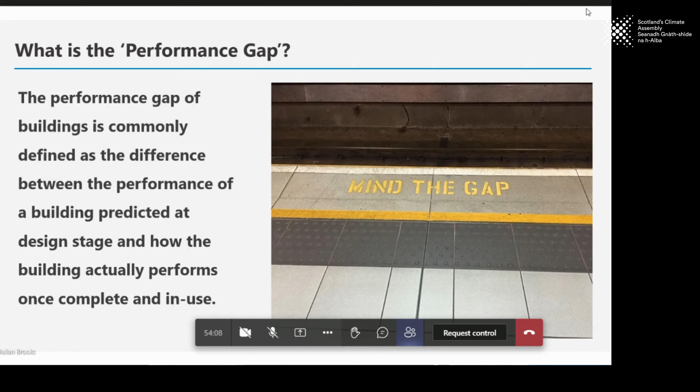So is it just about energy? No, it's not. As I said earlier, it's about the occupant comfort issues, whether it's temperature, drafts, humidity, overheating, the indoor air quality, the amount of fresh air changes, CO2 levels, and moisture.

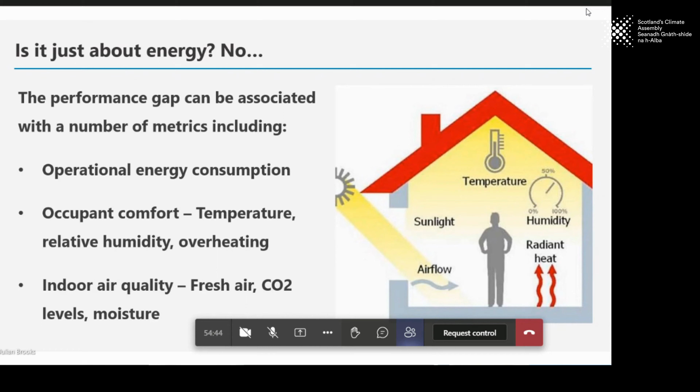I believe in Scotland, building regs, you've had CO2 monitors actually installed in new homes. Correct me please if I'm wrong, but I think you have. So you're actually already in advance of some of these issues and fully aware of them.

Why does it occur? Poor design, modelling, inaccurate occupant behaviour assumptions. There's a lot in that statement, probably not worth unpicking too much of it now - maybe we can do that in the workshop. Poor workmanship and on-site practice, an age-old problem. A lot of trades, a lot of coordination, and not always well managed.

Substitution of materials from those originally specified. They used to call that value engineering when I was in that business, but actually it's more than that. A lot of the time you are getting a cheaper product with poorer performance.

Insufficient inspection and on-site verification, a lack of police on site, the building police effectively. I don't know what it's like in Scotland, but certainly in England, that particular discipline has been pared down, hollowed out over the years, and there aren't enough people on site doing that checking.

And then contractors and training for them so they can understand the importance of these details - an age-old problem. Some contractors are too busy to let their operatives be let off for the day to go and do some training. But we can discuss that more fully in the workshop. Lack of understanding of building standards and requirements, says it all.

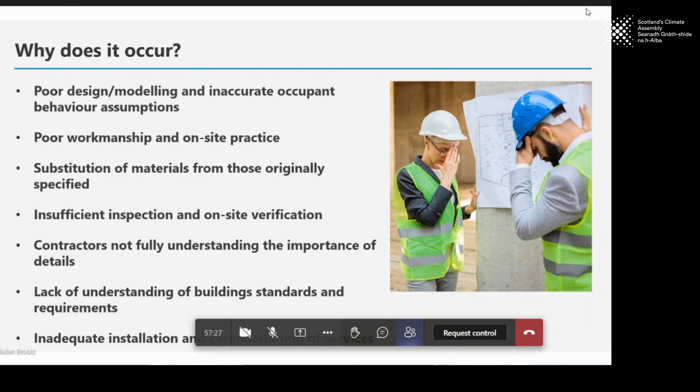How are we doing on time, Laurie? I'm not sure, where are we? 13:28. You're a wee bit over time, but not really, because we started a bit late, so you've got a few minutes.

I'll rattle through. So how can we close this performance gap? There are lots of studies on this, and there are tools. Passivhaus will help massively because it's such a robust process. So you've already picked Passivhaus out, which is great - you're already more than halfway there.

Building Performance Evaluation, or BPE, is a term you're going to hear more and more of on our journey to net zero new housing. I think there's going to be a new discipline here. For those thinking about a future vocation and interested in buildings, there's scope for a building performance evaluation assessor or evaluator. There will be courses coming up - one place to watch is the University of Sheffield, where Professor Fiona Stevenson works, but hopefully Strathclyde might be doing something too, they've got some good people there. So BPE, look out for that.

There'll be a new British standard on this as well, 40101. It's due to come out early next year.

Quality assurance methodologies - there's a couple around. One was developed by Bioregional called BEPIT, which is worth checking out. It's got an interesting little acronym, I won't go into what it stands for because I can't remember. The other one is the Assured Performance Process, which we're involved with the National Energy Foundation on, so look out for that next year. I'll talk about that in a minute.

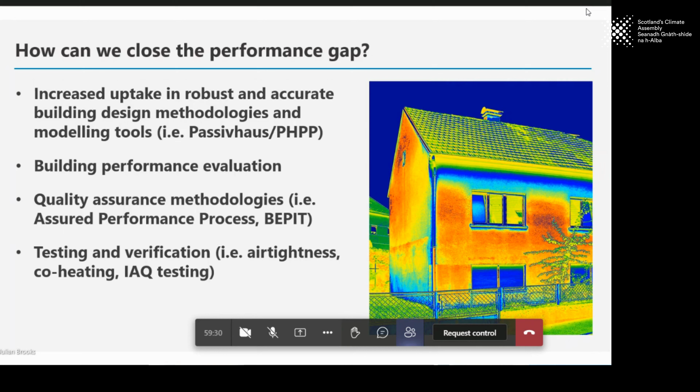And then testing and verification - air tightness testing, coheating, indoor air quality testing, all of that will have to take place. We've developed some model employer's requirements around this, available for free from our website.

What do homeowners want? Well, as these homes don't perform as predicted, it leaves homeowners with this issue. Generally though, they don't have a clue about these performance gap issues. It's not something the estate agents or sales office of the house builder will tell you about. So there's an issue about education of homeowners that still needs to be done - maybe the Climate Assembly wants to look at education around those issues. It needs to be demanded by buyers.

We did some survey work with the Design Council - we're involved - and it picked up on what matters most: homes that are comfortable and easy and affordable to run and maintain. A no-brainer, really. But the performance gap doesn't provide that, so it makes those things harder to attain.

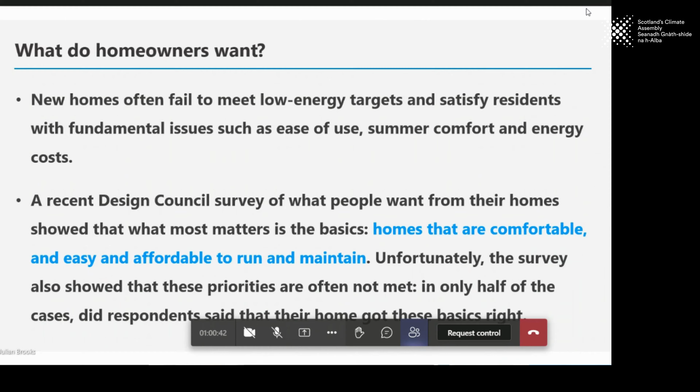We've also been doing some State of the Nation review work on performance evaluation of new homes, with some shocking results, which is also available. I mentioned the British Standard and the training that's needed - we're working with the Building Performance Network to create online training materials for building performance evaluation and QA. Look out for that. It's not ready yet, maybe next year in the summer we'll have something available.

The Assured Performance process is a very robust, thorough process, going from early design stage all the way through to completion and beyond. This is a tool effectively designed to eradicate the performance gap, and that will be relaunching next year.

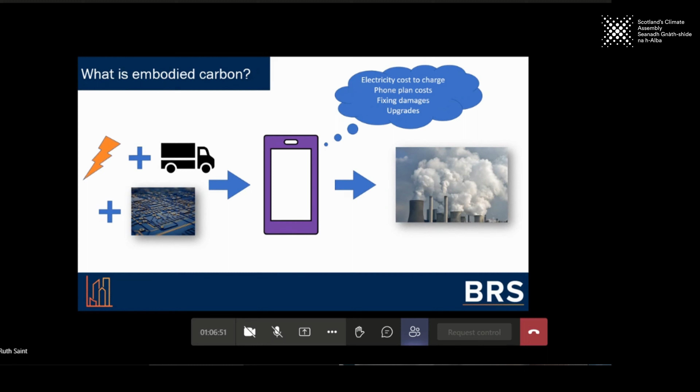So, what is embodied carbon? Say you get a new phone. The main things you're thinking about are probably how much that phone is going to cost you to run, for charging and bills etc, and how long you're going to keep it for. You're probably not thinking about all the energy and materials that have been spent to make the phone in your hand, and the environmental impacts associated with production of that energy, and the mining, extracting, processing and transport of the materials needed to make the phone, as they are embodied in the product itself. So when that phone leaves the shop shelf and goes home with you, there is a long trail of impacts left in its wake, and these are known as embodied impacts. So to make that phone, there is a hidden environmental price that people often don't think about.

Stage B is the use phase and is where the operational emissions occur. Stage C is the end of life stage, where the building and its components get deconstructed or demolished. Stage D is a supplementary stage to the life cycle and considers reuse, recovery, and recycling potential, including the benefits associated with keeping materials in the resource loop, which is where design for disassembly or demountability is very important.

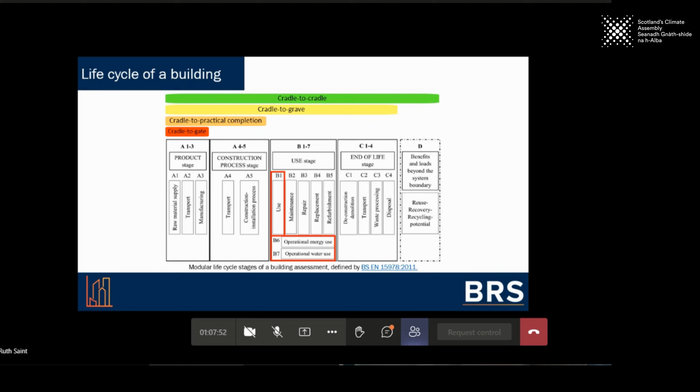So of these life cycle stages, only stage B1, B6, and B7 refer to operational. The majority of the life cycle falls under embodied impacts of the building.

So these are some of the climate assembly recommendations related to embodied carbon. I'm not going to read them all out, but basically the recommendations for the first goal around quality standards of EnerPHit and Passivhaus design, which Sarah will talk about after me, are around building standards regulations and include whole life assessments, including embodied and operational impacts, and design being driven by end-of-life reusability and recyclability through design for deconstruction.

The second goal here, around retrofitting Scotland's existing building stock, includes recommendations to retrofit all homes and decarbonise by 2030.

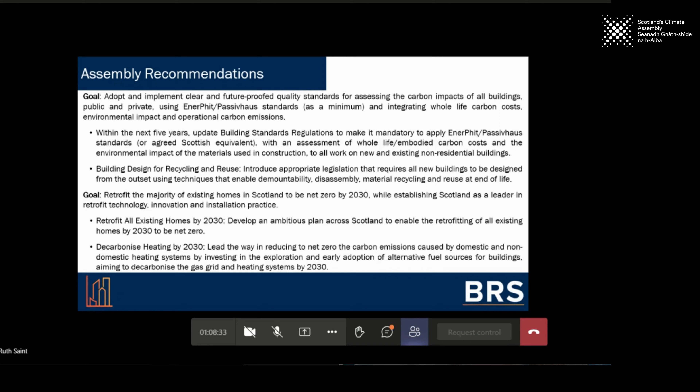In terms of the first goal and whole life assessments when designing to Passivhaus and EnerPHit standards, this is really important because the built environment is responsible for approximately 45% of CO2 emissions from the energy consumption of residential and commercial properties for space and water heating, cooling, lighting, etc. So the operational emissions. Passivhaus and EnerPHit standards aim to significantly improve the operational efficiency of homes, thus driving down its demand. Alongside this, though, as you drive down operational emissions, the proportional contribution of embodied emissions gets bigger.

So the stats shown here give an indication of this shift, with the embodied carbon contribution to the whole life cycle impacts being between 11 and 33% for passive designs, which is not necessarily the same as Passivhaus standard, and as much as 100% for near zero energy buildings, which is where the definition only considers operational energy and the energy supply is largely from renewable sources.

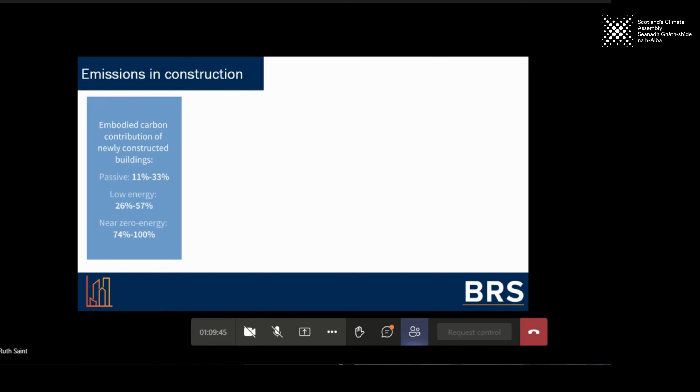So it's very important that materials and technologies are selected carefully, considering source of supply and logistics, that the energy efficiency of construction practices is increased and optimized, that embodied impacts are considered as early as possible in the design stage, and that design for deconstruction is implemented. It's also really important to bring everyone involved in the design to the table at the very start in order to choose a well-balanced, fit-for-purpose solution.

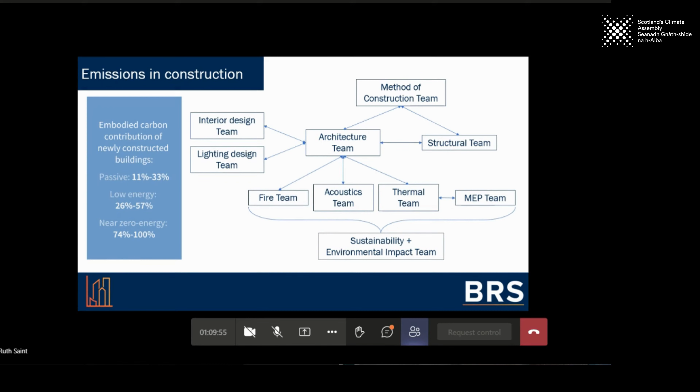For type 1, there is no link between embodied and operational carbon. For example, a smaller versus a larger steel beam in a building. The larger beam will incur more embodied carbon because it's bigger, but it does not offer any additional operational energy and therefore carbon reduction benefits. If the smaller beam is able to provide all the structural requirements and fulfills the same function, obviously you would choose that one. Otherwise, you're over-engineering for the sake of it, essentially wasting carbon and probably increasing costs.

For type 2, where there is a direct proportionality relationship, we have an example of a timber window frame versus a steel window frame. The timber has a lower U value than the steel frame, i.e. it loses heat more slowly, so it contributes towards lower operational emissions as there's less heat loss, but it also has a lower embodied carbon impact because the raw material extraction and processing is less energy intensive. Also, you have the added benefit that the timber acts as a carbon store throughout its useful life as trees absorb CO2. So the obvious choice here is a timber frame, as you benefit twice: greater thermal performance and lower embodied impacts.

Now type 3, inverse proportionality - this one is tricky. Let's say we wrap a building with extra insulation, and that creates a spike in the embodied carbon right now, as we're paying this upfront embodied carbon cost to have operational energy demand reduction across the next however many years. So this insulation is being added while our energy grid is still relatively carbon intensive.

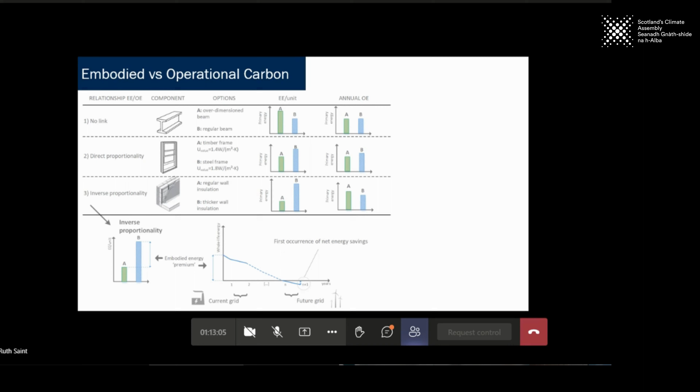So the same applies to any retrofit measure you add to a building, and the question is, if we carry out retrofit at scale, will it pay itself off? When does it pay itself off? With the ambitious recommendations laid out in the Climate Assembly report to retrofit all Scottish homes by 2030 to be net zero.

Or will it be too late by the time it pays itself off? So by the time it actually becomes net zero? And this is just Scotland. So what if this was scaled globally? How can anything be truly net zero if we don't consider the embodied impacts?

You're neglecting the majority of the building or product life cycle. So we need to think very carefully about our building stock and make smart carbon investments today, considering the whole life cycle impacts, not just operational, and future-proofing the decisions we make as best we can.

Now, I'm not advocating against retrofit at all. Strong measures do need to be taken, and something needs to be done to address the climate crisis. What I am advocating for is that embodied emissions are seriously brought into the conversation, and that they are at the forefront throughout all stages of building or retrofit projects. And embodied emissions need to be balanced against operational savings, considering the future of our energy landscape.

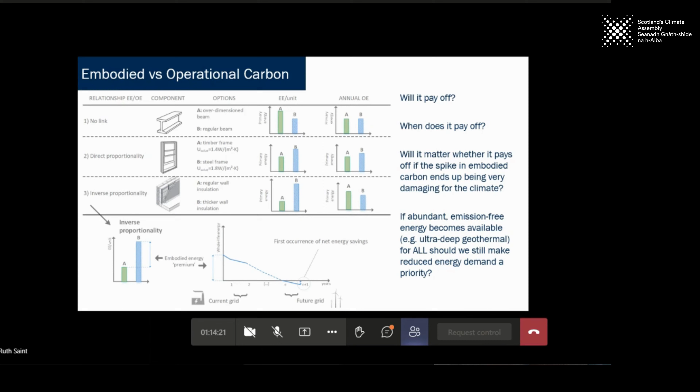So if anyone wants to read more about this, there are 3 great documents from LETI. The Climate Emergency Design Guide lays out a strategy for new builds, and linked to this is the Embodied Carbon Primer, which is an excellent document that allows people who are not familiar with the topic of embodied carbon to get a good understanding of it.

Also, the Climate Emergency Retrofit Guide for existing buildings, which are more problematic as you don't have the freedom you do with new build. You have to work with what is already there. It's very useful and offers a quick start guide to help you set appropriate targets and identify the best approach. It also offers a holistic view of sustainability and allows you to make a case for retrofit based on environmental, economic, and social factors.

So with that, I'll end on the reminder that although carbon is a hot topic at the moment and a very pressing issue, climate change is not the only environmental issue facing us. There are numerous other environmental factors to consider, and by focusing solely on carbon, we risk shifting the problem onto other areas of damage. To be truly sustainable, we need to balance holistic environmental impacts, weighing the benefit and harm across all environmental indicators, balanced with social and economic factors. Especially given the scale of the issues we're facing, we need a multidisciplinary approach, and we need to get it right the first time. Thank you.

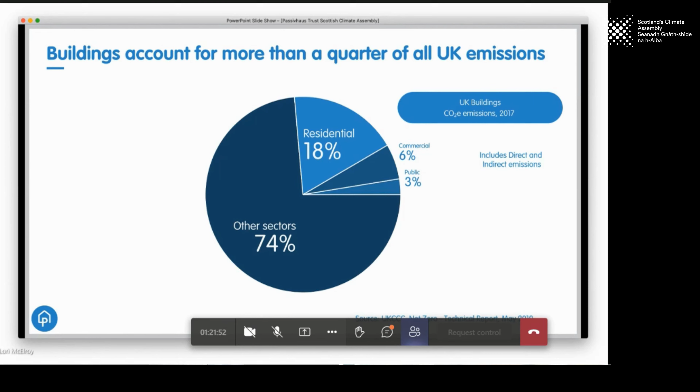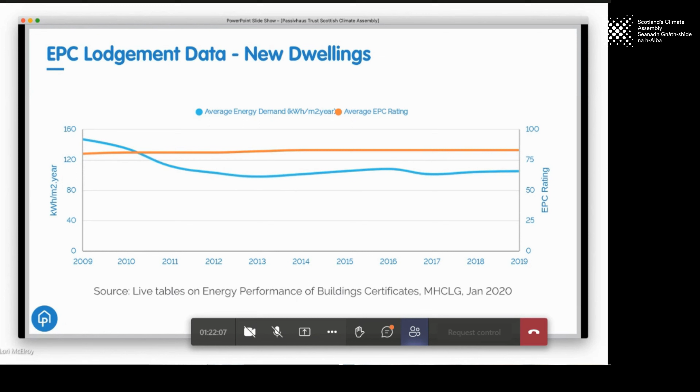This chart looks at the energy performance certificates lodged for all new dwellings in the UK over the decade 2009 to 2019. Shockingly, we see almost a complete flat line in terms of energy improvements. So in effect, we have this lost decade in our fight against climate change in our sector.

As the grid is decarbonised, there's an increasing case for us to use more electricity for heating purposes. So we need to move our homes from high carbon gas onto electricity, which means the heating loads previously satisfied by gas are going to need to be met by our electricity grid.

This is showing the gas use of our existing homes, just for heating and hot water—that's the orange and turquoise bar—and this is the peak load. You can see in blue what the electricity grid capacity is in 2019, predicted for 2030, and even predicted for 2050. So demand reduction is going to have to be part of the solution.

Another thing to point out is that if we don't retrofit our buildings and make them more efficient, there's of course an embodied carbon to doing that, but there's also a huge embodied carbon impact to having to build a huge amount of infrastructure and new renewable technology, lots of wind turbines, to supply that demand otherwise. So we have to consider that when we look at the big holistic picture.

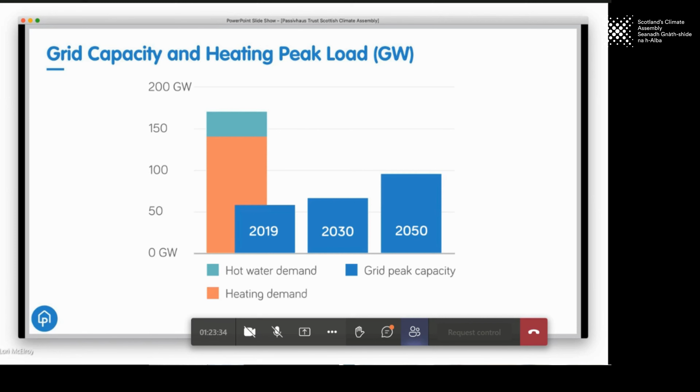When I talk about demand response, that's essentially this idea that not everything needs to be supplied to us all the time, not everything needs to be on all the time. So we could use this sort of demand response in a domestic house.

More specifically, if we look at the biggest energy demand in our homes, that's space heating, we can see what this would do to a typical UK home.

On the left axis, the red line shows the internal temperature, while on the right axis, the blue line shows the heating energy power being used by the home. In a typical home, the internal temperature drops off when the heating's not on, down to about 15 degrees. So we need to inject that heat to get the temperature up when we want it, in the morning or evening when we're using our home—and actually right now, a lot more common throughout the day when we're working from home.

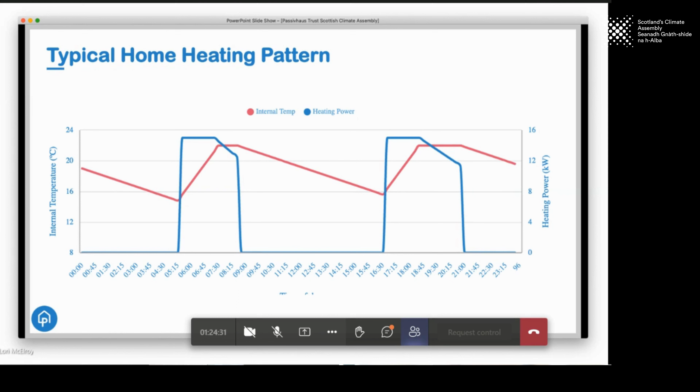By contrast, a passive house home can effectively take that heat at any time, so it's a much more flexible asset in that sense. In the traditional house, if you'd load shifted the demand to less peak times, your house would not have been warm when you wanted it to be. But a passive house is this flexible asset, and it can load shift to support demand on the grid.

The bottom line is that for demand response to work for a domestic building, we need a very efficient fabric to start off with. Then we can maintain a very comfortable internal temperature without any impact on the occupants.

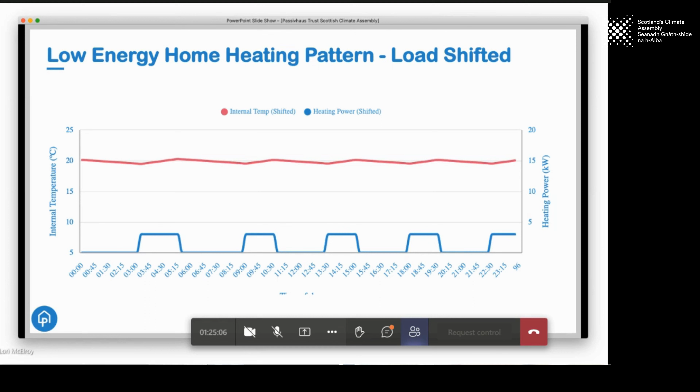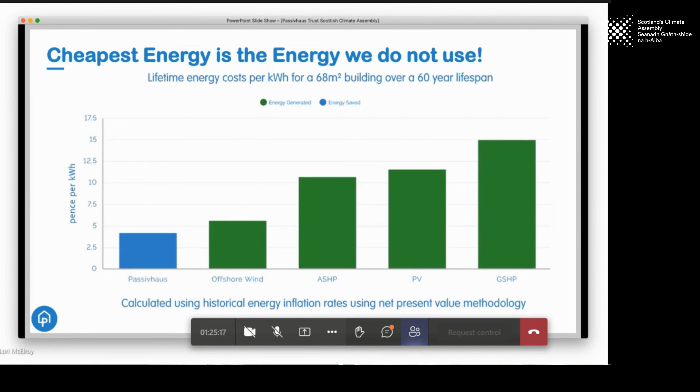An argument you hear a lot is that passive house and very low energy buildings are just too expensive. But we looked at the big picture and compared the cost of building more efficiently over the lifetime of a building—here we've taken 60 years—with the alternative of producing more energy, that's building more infrastructure. We can see the cost is 3 or 4 pence per kilowatt hour saved for building more efficiently, while the cost of generating that kilowatt is more expensive than saving it in every scenario for all forms of renewable energy. So saving a kilowatt is going to cost us as a country less than generating one.

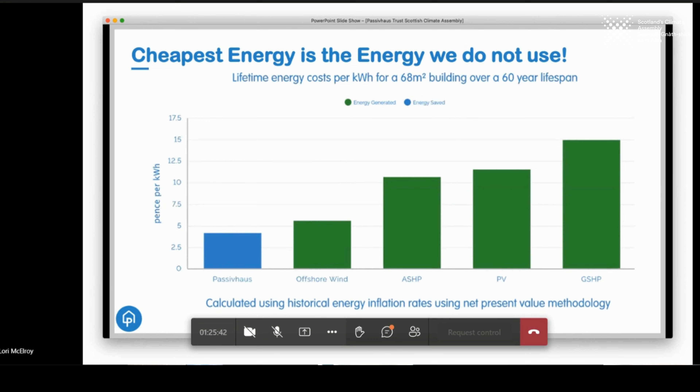I'm just going to spend the last couple of minutes running through a brief introduction to Passive House and EnerPHit, although I think a lot of people on the call will already be fairly familiar with the standard.

Passive House is this leading international energy standard. I'm just going to pull out a couple of these elements to give you an idea of the breadth of the standard—I've managed to lose the presentation on the screen, I don't know whether everybody else has.

It's still working, I'm now seeing the Chrome window. I'll see it again now, yeah. So you can just go on to the next slide. So this is the next.

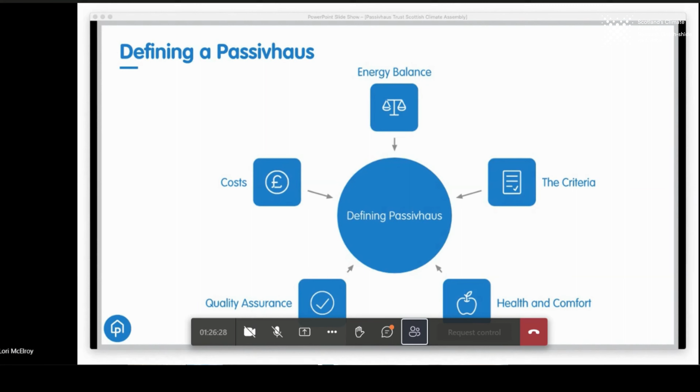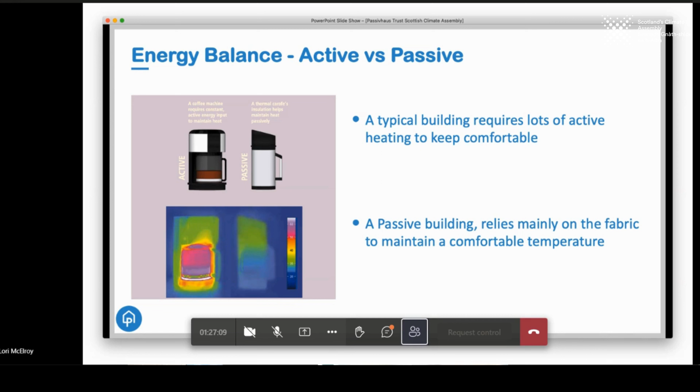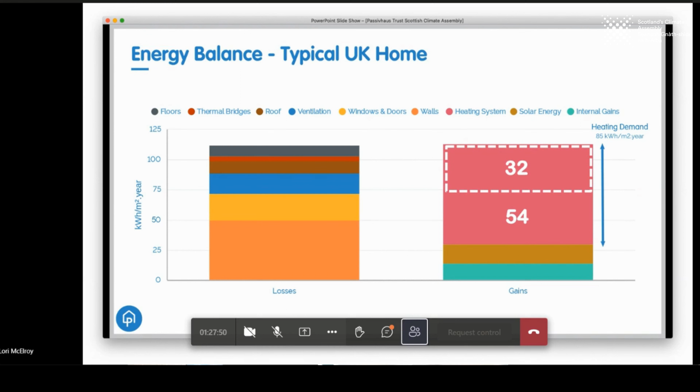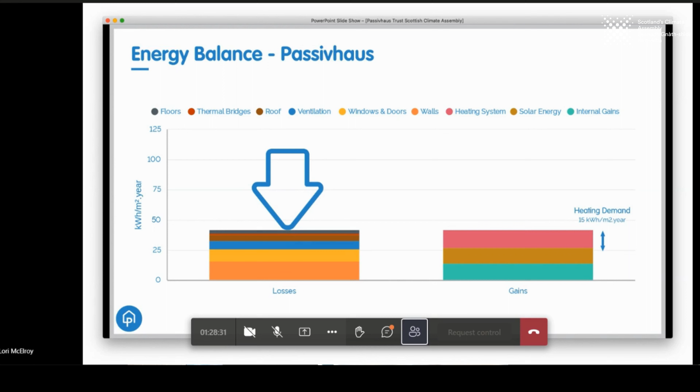Next slide. So let's just say there's no performance gap - mind the gaps, that's what Julian was saying, so I don't need to linger on that. But on average, from monitoring, we know that the existing performance gap in new build homes is around 60% more space heat demand than designed, which is quite shocking.

Finally, a passive house is not asking us to radically rethink how we construct buildings. It simply requires us to do what we already do, but do it a little bit - actually quite a bit - better, with more quality control throughout the design and construction stages, eliminating that performance gap in the process.

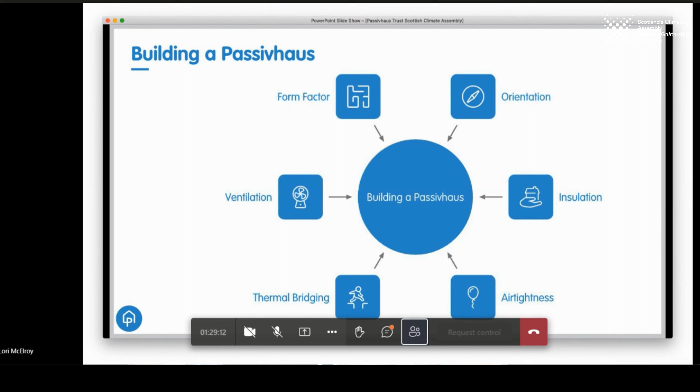Next slide. While passive house is often assumed to be primarily an energy standard, it does do that well, but it also has loads of other benefits in terms of health and well-being, performance, finance, and broader societal effects. A passive house building results in a much more comfortable building throughout the year with spaces that are healthy to be in. When we look at the alternative scenarios so common in millions of buildings in the UK, with uncomfortable, unhealthy buildings pushing people into fuel poverty and creating measurable negative impacts on people's long-term physical health, passive house really becomes a no-brainer. Next slide.